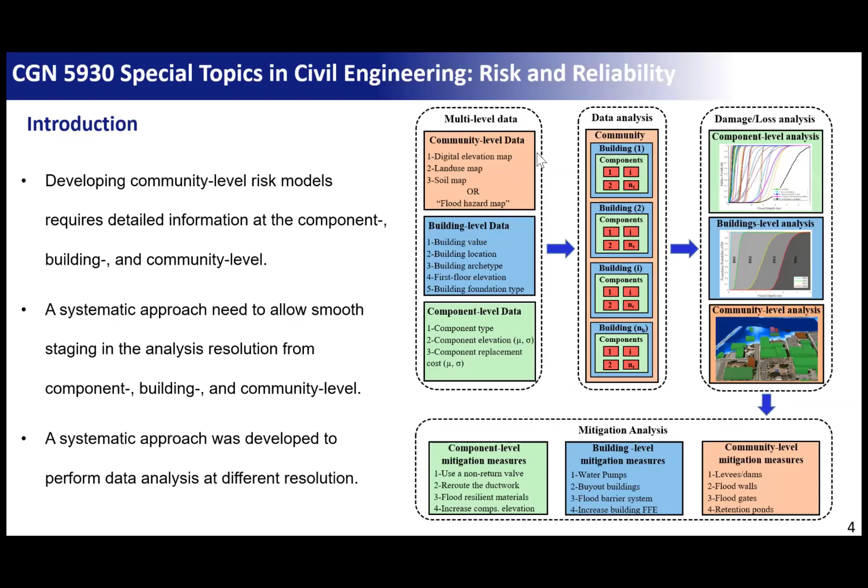All right, so the research in risk and resilience has three main areas that you can search in: risk analysis, resilience analysis, and recovery analysis. As I explained, risk needs a background about the hazard, the exposure, and the vulnerability. Hazards could be, for example, hurricanes, which I was talking about here. Hurricanes have lots of hazard components. They come with wind and with flooding, and the flooding has different types: coastal flooding, fluvial, and pluvial.

Because when hurricanes hit a coastal community, the coastal community is exposed to surge, seawater coming from the sea. But rainfall also comes on the inland community, and this rainfall gets into rivers, and the rivers make riverine flooding. So it also has fluvial. Fluvial is riverine flooding, pluvial is rainfall flooding. The rainfall itself is sometimes very heavy and causes lots of rainfall flooding.

And waves are one of the most destructive hazards that come with hurricanes. They cause structural damage. Surge usually causes content damage because it's just rising water. It doesn't push the buildings that badly, but the waves cause lots of structural damage. So waves are one of the severe hazards that come with hurricanes. So if you want to do research in multi-hazard hurricanes, you should have a background in all these types of hazards: wind, surge, wave, and so on.

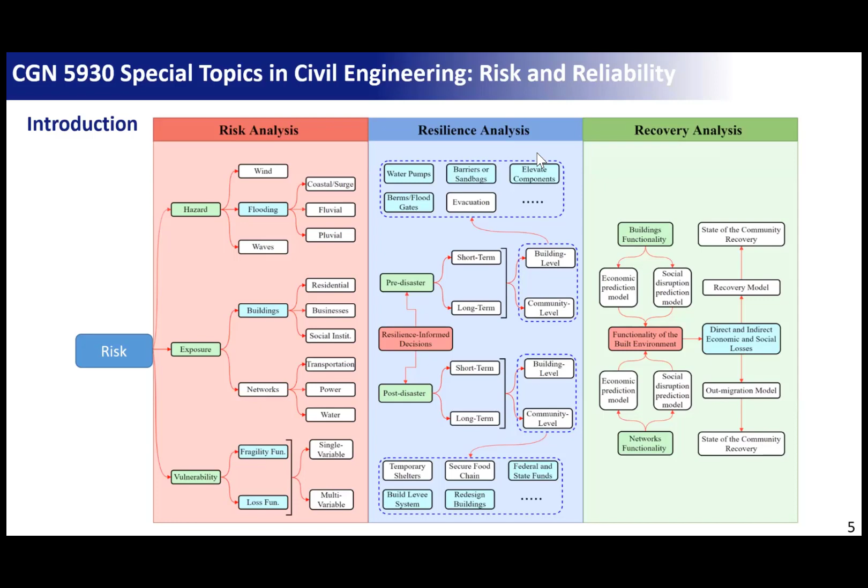Okay, so this is just kind of an overview of the different analyses that you can do in the general realm of community resilience. Well, let's see an example of a flood risk analysis, just to know how these concepts are translated into research. For flood risk analysis, I'm going to show an example of one of the communities that we have been working on for 5 or 6 years, modeling the community resilience of this community following natural hazards.

So this community is called Lumberton. So this is the city of Lumberton here. This is a small point, and this is how it looks. And every point here is actually...

Is it much better now? Yeah. So every point here is a building, and they are color coded based on the occupancy.

The green is residential, the red are commercial, and there's some yellow, which is schools and hospitals. And this city is in Robeson County in North Carolina. So here's the location with respect to North Carolina.

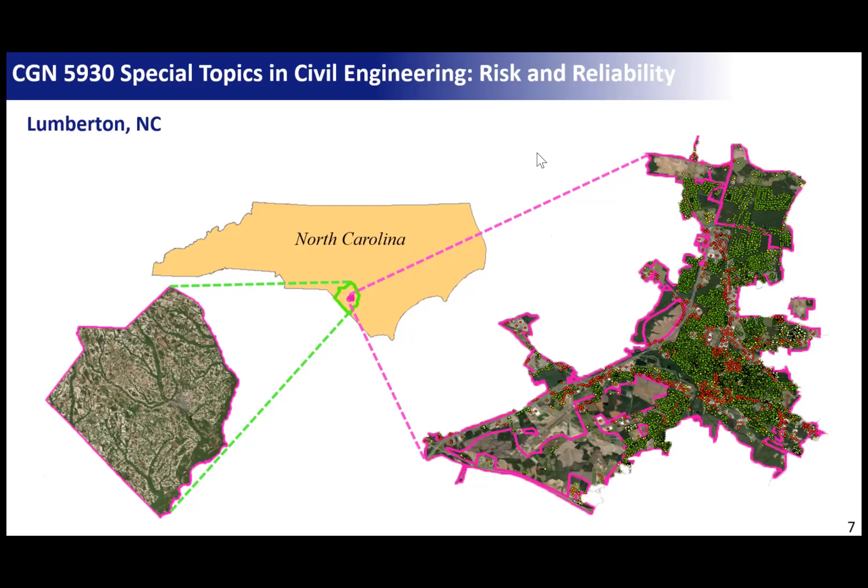So for the risk modeling for this community, to do flood risk analysis, we have to go through flood hazard modeling. We will have to go through 2 main processes. The first one is hydrologic modeling. So there's a rainfall, and this rainfall is falling on the ground. So we need to know how much is the flow in the main streams. We call this hydrologic analysis: to transform the rainfall into water flow. So we need to know how much water flows in each stream.

And to know this, we need to have a digital elevation map. We need to know what is the elevation of the ground. Okay. And we need to have a soil map and land use map, because both of these will tell me how much water is deeply infiltrated in the ground and how much water is on the surface. And we do some analysis on the DEM and on soil and land use to identify where the rivers are, what is the river's length, the river's slope, and all the basin characteristics.

The basin, I mean, we divide the city into basins, like catchments that catch the water. And where is the river in each basin? And what is the basin slope, centroid, and what is the longest flow path? Where is the water going that long? And based on this and using the rainfall information, we know what is the flow in each stream. And we get that flow in terms of what is called a flow hydrograph. The flow hydrograph tells you how the water flow is changing over time in the stream.

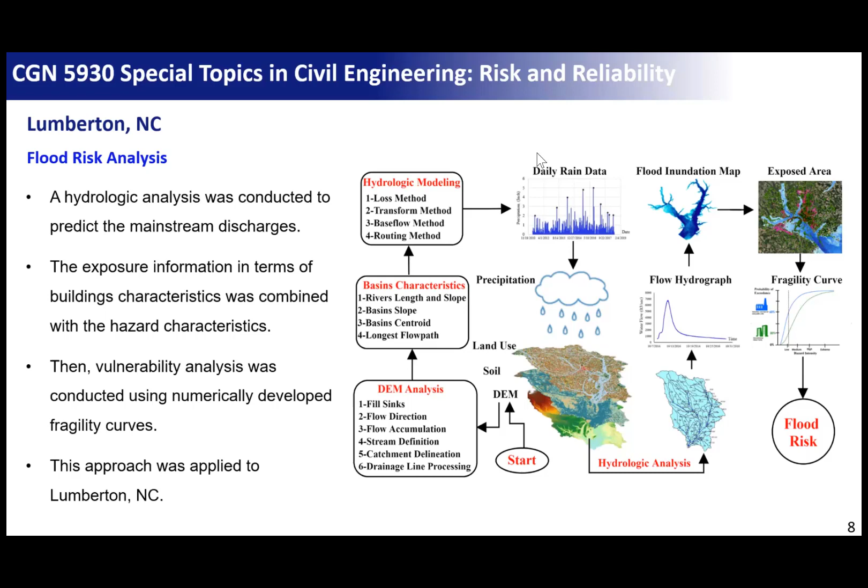We studied this community after Hurricane Matthew. Hurricane Matthew happened in 2016. It started as a Category 1 storm in the Caribbean, intensified to Cat 5, and made landfall as Cat 4 on eastern Cuba, then made its second landfall on the east side of North Carolina here. It was a Cat 1 storm, but the Cat 1 storm brought lots of rainfall in North Carolina.

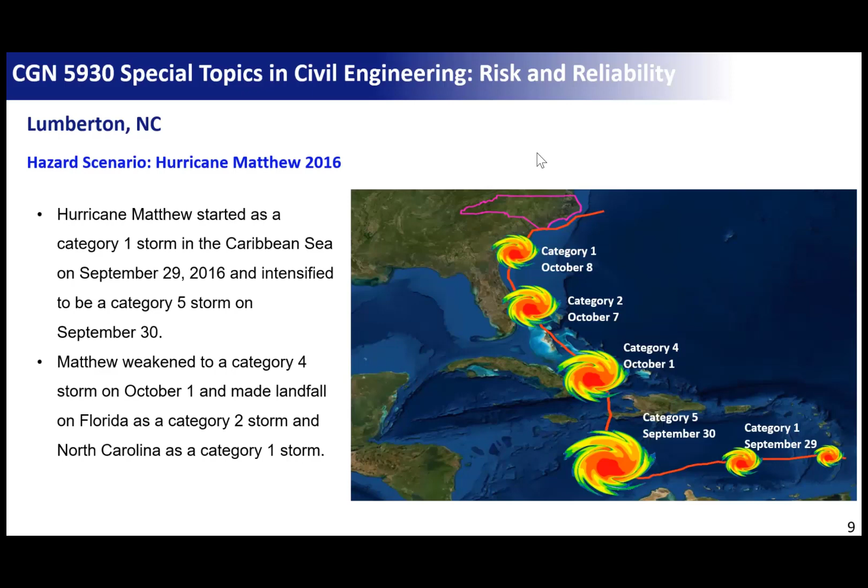Lumberton is here, which is away from where the storm made landfall, but the rainfall was very hazardous in this area. There was like 10 inches of rain. It was raining for 2 days and caused severe flooding in Lumberton, North Carolina. Here's how the rainfall intensity looked, in inches. Here's where the maximum rainfall happened, and Lumberton is actually in this location, and this is how the streets looked like within Lumberton.

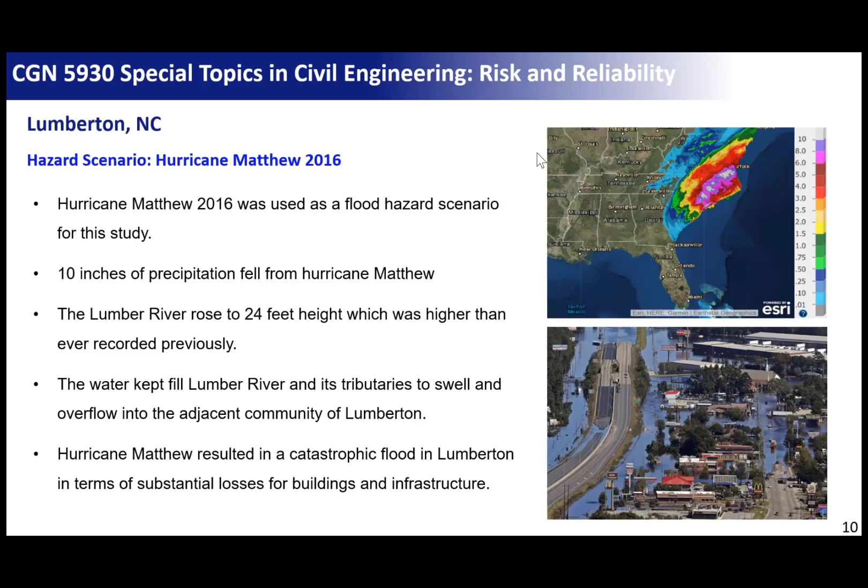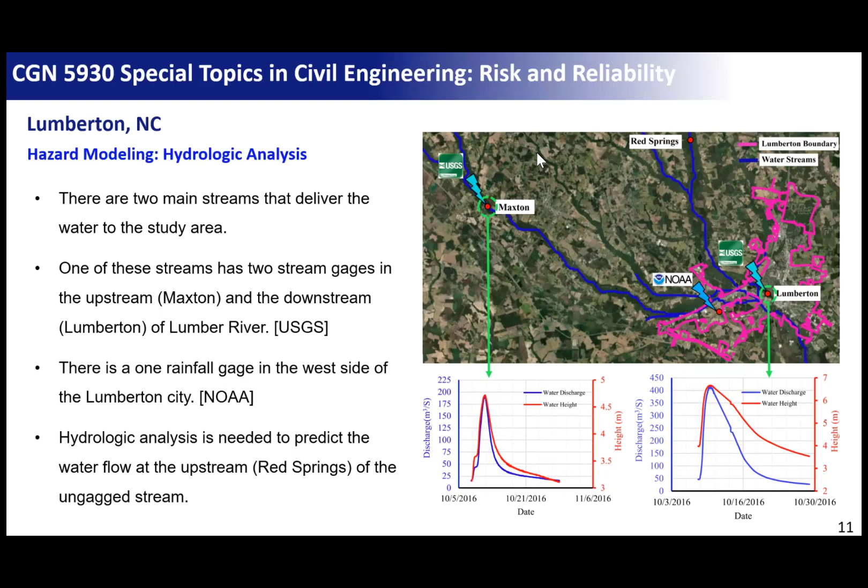The first thing we did for this city, we did hydrologic modeling to identify the flow hydrographs in the stream. We need to know how much flow is in this stream and how much flow is in the other stream. These two flows come together and enter the city here and make flooding. So this is an example. The flow comes from here as a boundary condition, and flow comes from here as a boundary condition. And here's how the water is getting into the city. This is how we model the hazard.

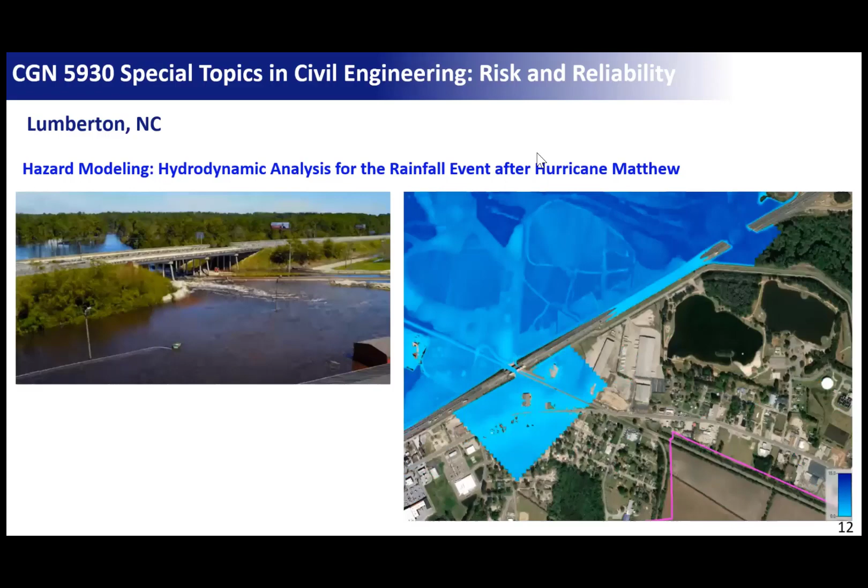Can you see this gap? There's an intersection between a bridge, between a highway and a railroad. Here's how the water is coming at this location. Most of the water is coming to the community from this location. That's what I was talking about. If we were able to plug the water here, we could have reduced the amount of flood damage.

This actually shows a scene of where the bridge is and how the water was coming, but not from Hurricane Matthew. It was from a hurricane that happened 2 years after, called Hurricane Florence, but it was much worse in Matthew. Florence was less intense. You see here how the flood happens, and this is how the hydrodynamic simulation looks. And these are the hazard maps that we need to use to identify the exposed assets.

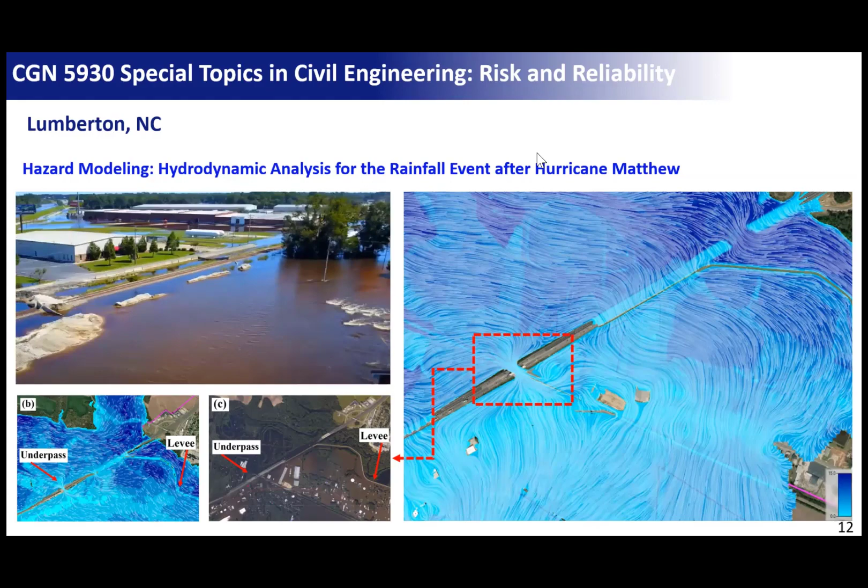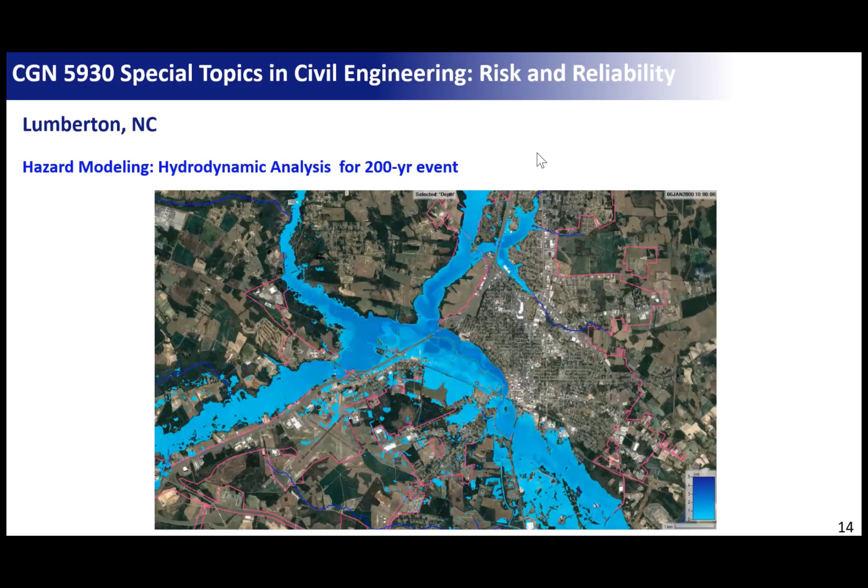But if we compare it with a 100-year event or a 200-year event, it will be completely different because it will be much more intense flooding. You will find much more flooding inland, and water overflows the rivers and floods the community. So we saw a real event like Hurricane Matthew and return period events like the 10-year or 200-year return period. And this is what we mean by hazard.

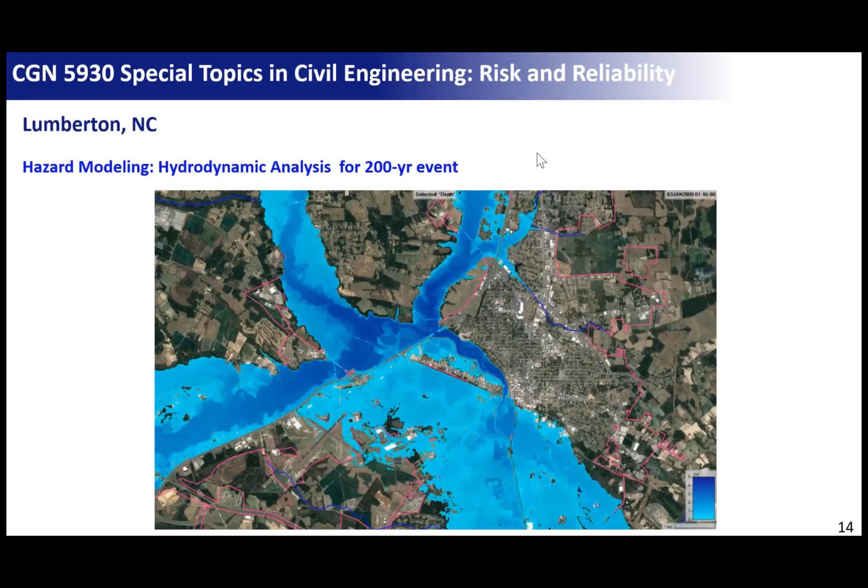The second thing is modeling communities. We need to model communities to identify the exposed assets within them. To model this community, we need data about the buildings, right? To know the exposed assets, we need to know where the residential buildings are. For buildings, we need to know the building materials, the number of stories, building use, the foundation type, the floor elevation, and ground elevation. You need to know all this information to know how vulnerable the building will be.

Because a building 1 meter from the ground is completely different from a building 3 meters from the ground. A concrete building is completely different from a wood building, right? So we need to know all this information. This data can be provided by the state; North Carolina actually has very detailed building data, open to the public. They can tell you how many nails are in the shingles of each building. But other communities don't have this data and we need to make assumptions. Getting the data is very hard. Sometimes we pay for data, sometimes we get it for free.

Sometimes we actually use Google Street View, walking the streets in Google Maps building by building, and identify: okay, this building is 2 stories, this building has a hip roof, has a gable roof, and we do this. But this process is very tedious when you have thousands of buildings. If I have like 300, I can do it.

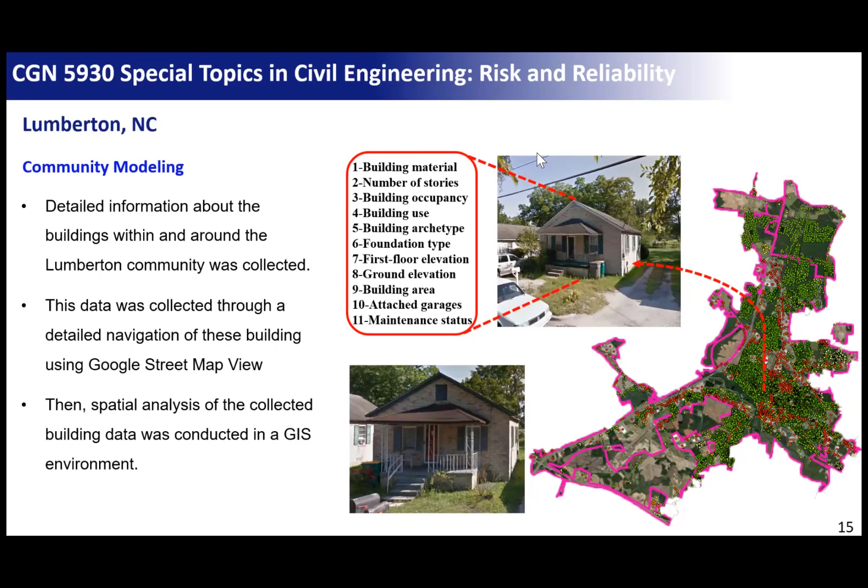So for flooding, we developed, for this community, 15 building archetypes. These archetypes have 4 residential buildings, 5 commercial buildings like gas stations, strip malls, shopping centers like Target and Walmart, 2 schools, 1-story and 2-story school, hospital, community center like church, office buildings, warehouse, lots of different building archetypes.

And we know detailed vulnerability information of these archetypes. We have the fragility function or the vulnerability function or the damage function for each one of these buildings. But the challenge is, how can we know that a specific building in my real community matches these archetypes? How can we say that this specific building here is archetype F1, or this building is archetype F4, or this building is archetype F5? Okay, so this is a challenge. How can we know this?

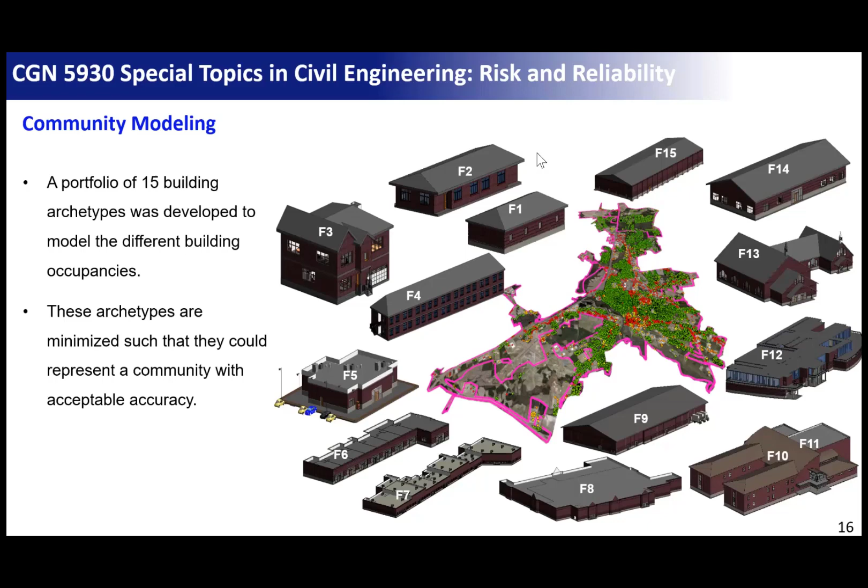So we developed an algorithm. So this is actually the archetype 15, and these are some of them, like the names, like one-story residential building on a slab-on-grade foundation, or F11 two-story school. Okay, so the next challenge is, how can we know that this building is a specific archetype?

So to know that a specific building is a specific archetype, I need to know all the information about this building. What is the construction material? What is the roof shape? What is the number of stories? What is the foundation type? All this information. And we developed an algorithm. It's like a for loop.

So this for loop goes building by building, and it checks, does this building have this type of foundation? Does this building have this number of stories? Does this building have this construction material? And if it satisfies all the conditions, this building is archetype F1, and then you check other conditions. So if it has a crawl space foundation, it's F1. If it has a slab-on-grade foundation, it's F2.

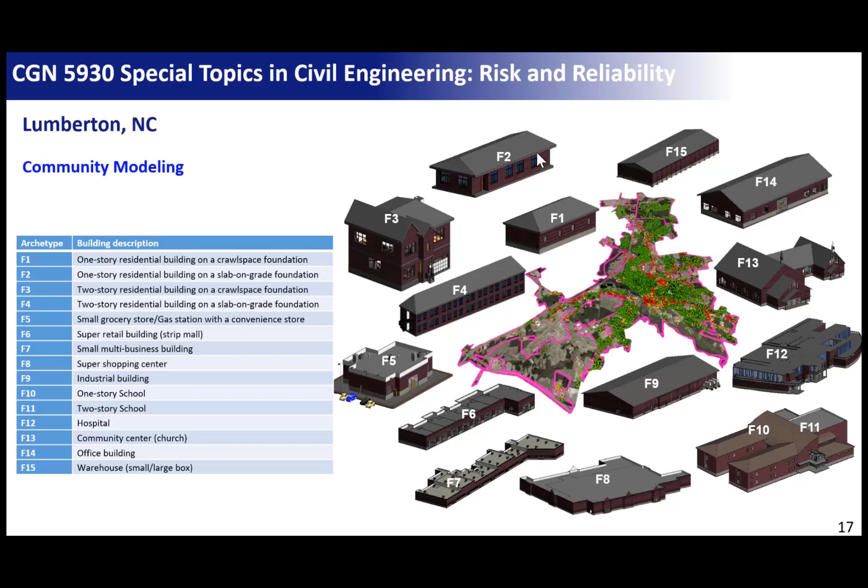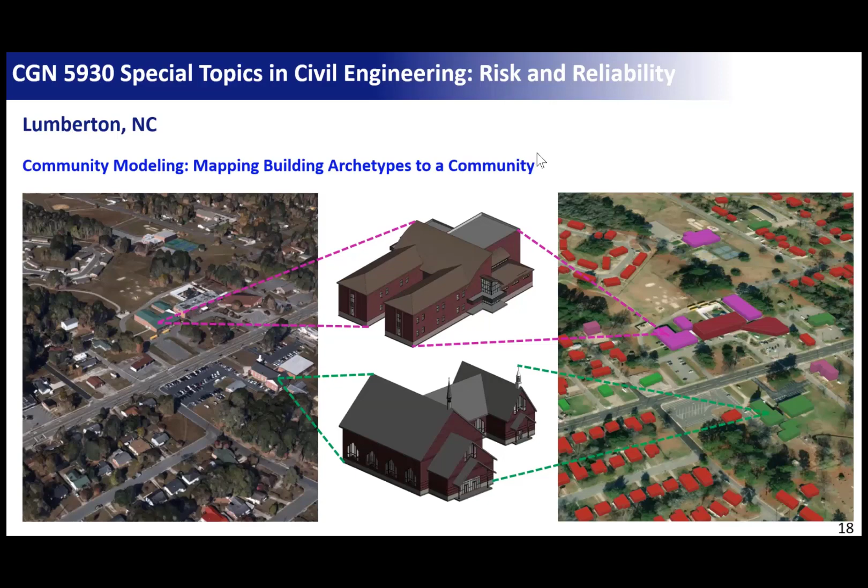So it's an algorithm that has a for loop embedded, and it checks building by building some conditions and assigns an archetype. And we call this the mapping algorithm. It actually maps real buildings. So I know that this is a church, so okay, I assign an archetype of a church. I know that this is a school, so I assign an archetype of a school, based on the mapping algorithm.

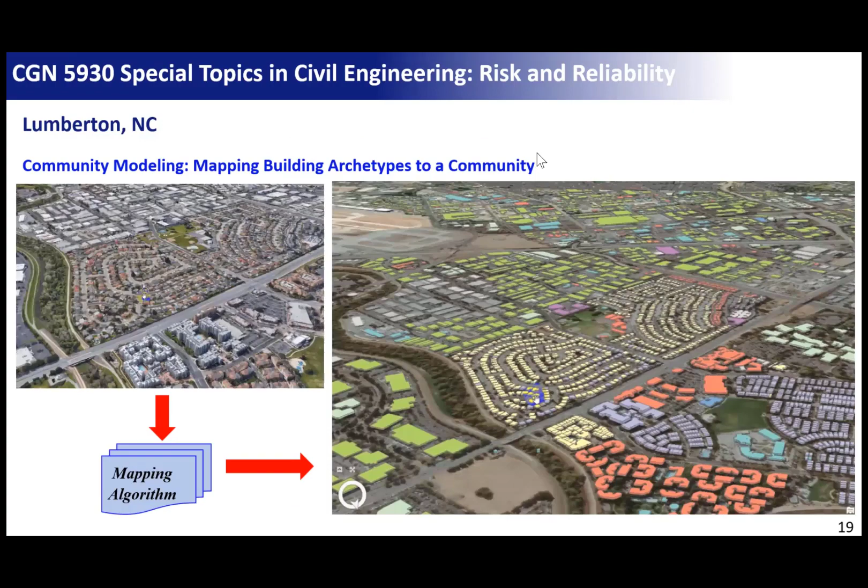We did this for many communities. This is one of the example communities that we applied this mapping algorithm to. So this is actually the real buildings, and these are the mapped archetypes, color-coded based on their archetype, like archetype 1, archetype 2, archetype 3. So right now, we were able to develop a model for the entire community, right?

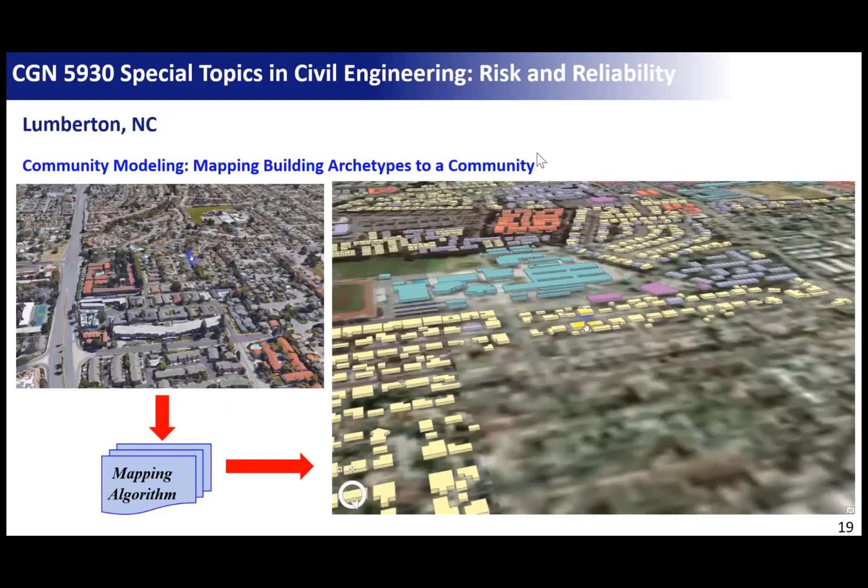The next step is to identify the exposure of these buildings. Which of these buildings are exposed and which are not exposed, and how much is the exposure? So the next step is to overlay the hazard map with the buildings. And once you overlay them by spatial analysis, you can identify what is the hazard intensity at each one of these buildings.

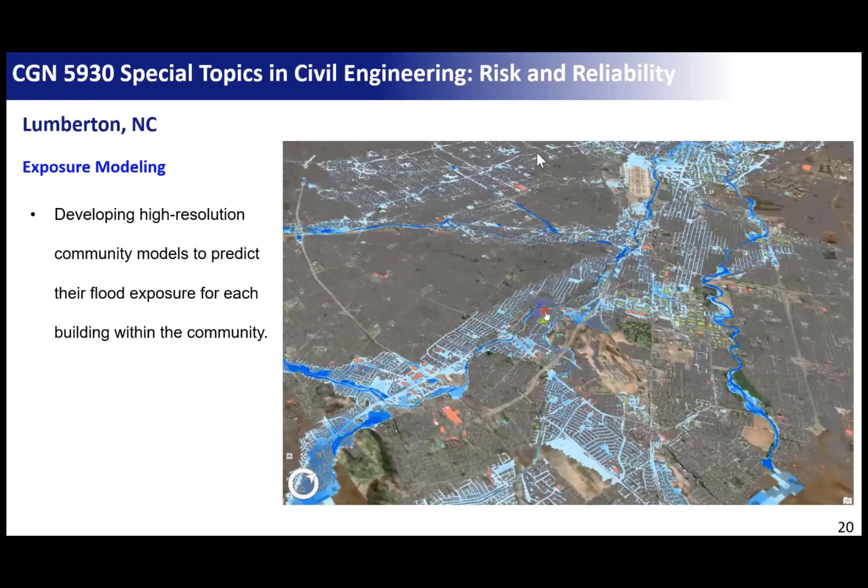Some of these buildings will have lots of flooding, some of them are not flooded. So that's what we call exposure analysis. You will know what is the flood depth at each one of these buildings. Once you know the flood depths at each one of these buildings, you can start the next step, the vulnerability.

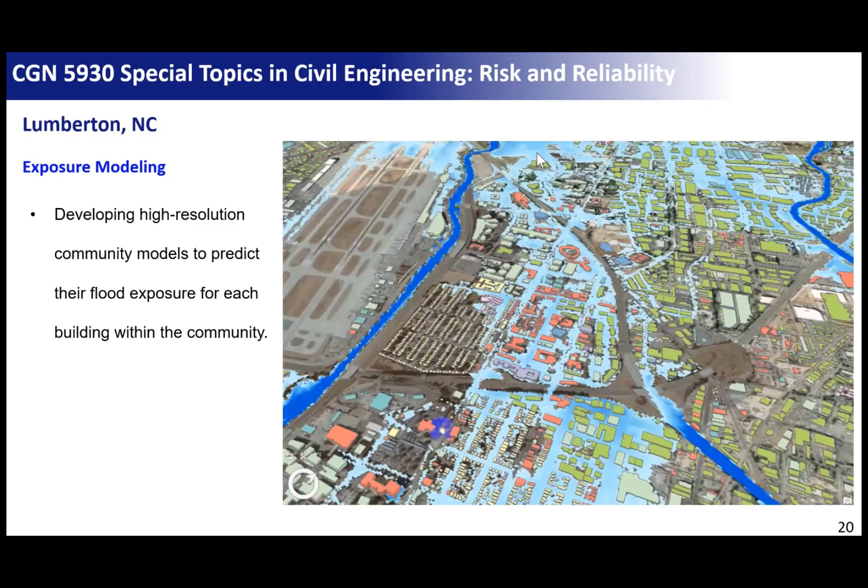Because to identify damage, you need to know the hazard intensity, like wind speed or the flood depths, so that you can know how vulnerable these buildings are. So to develop building-level vulnerability functions, we have to start with components. We have to know the vulnerability of each component within the building. And by vulnerability here, I mean flood vulnerability.

What is the vulnerability of your external AC unit? What is the vulnerability of this table or these chairs? The fridge, all the appliances, all your furniture, the couches, the beds, everything in your building. Okay, so what we did, we divided the building into components, and we identified the flood susceptibility of each one of these components. For example, this is a one-story residential building on a slab-on-grade foundation. It has over 65 components.

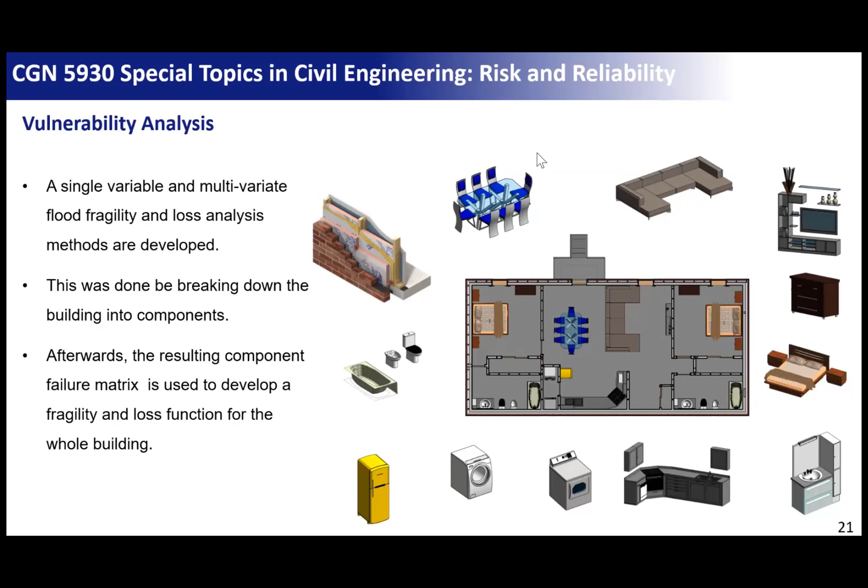We have a fragility function for each one of these components, and we use the concept of reliability and Monte Carlo simulation to develop a fragility function for each one of these components. So we have gone through a process. Let's assume that this is a wall, and this is the resistance of the wall. It's a normal distribution, okay? So let's assume the mean resistance of the wall is 1 meter flood depth.

So if you were hit with a flood depth of 0.5 meter, you will have, for example, 50% probability of failure, or 20%. But if you have a 1 meter flood depth, you might have 80% failure. But if you're hit with 3 meter flood depths, it might have 100% probability of failure. And that's what we are going to learn, how we can calculate the probability of failure of the components, knowing the distribution of the resistance, the probabilistic resistance of these components.

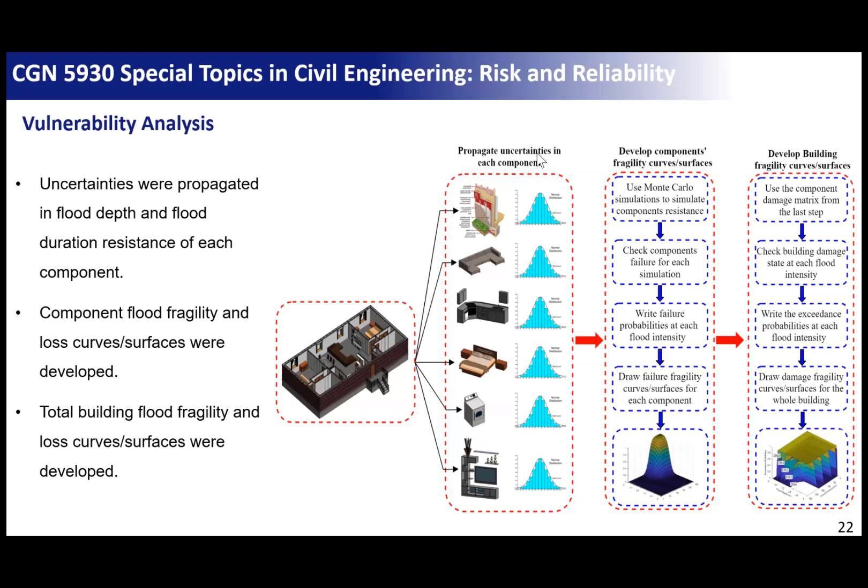Yeah, so this is an example that shows you the uncertainties. Sometimes we are not talking about real damage to the component, like the columns. We are talking about an AC unit or an electrical socket, something like this. If it's hit with water, it's gone. So how can we know this? Uncertainties can be in the elevation of the AC unit. Sometimes we see this AC unit is on the ground, right?

Some people put it 10 centimeters or 20 centimeters from the ground. Some people put it 80 centimeters from the ground. So there's uncertainty in the elevation of this AC unit, right? So if we were able to propagate the uncertainties and know the distribution, the mean level of the AC unit and the standard deviation, we can know the probability of failure of this AC unit. Okay, so that's what we do for every component in the building, like AC unit, appliances, furniture, and we were able to identify the probability of failure of each component.

But once you identify the probability of failure, the next step is: what is the impact of failure of this component on the total performance of the building? Okay, if you don't have an AC, you can live without AC for 2 days, so it's not that big a deal. But if all the appliances are damaged, stove, fridge, and your furniture, like couches, bed, you cannot live.

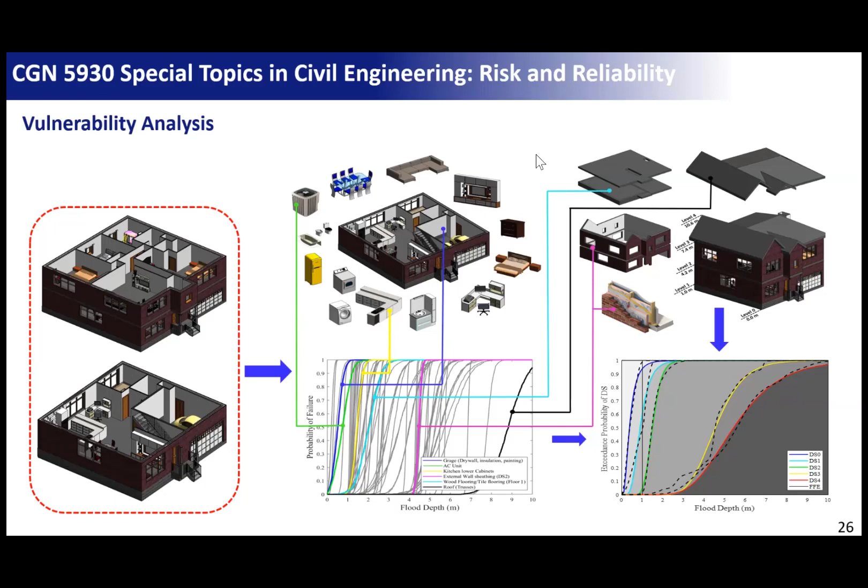And also this shows how we were able to convert component fragility into building fragility. So as I told you, there are some components that tell us what is the damage to your building. And when you have structural damage, we are talking about foundation, walls, roof, all this is structural damage. And when your structure is damaged, it doesn't matter how many components you have damaged, your building is entirely damaged because the structure needs to be demolished and get a new structure.

So I'm showing here an example of 5 components that tell us what is the probability of being in complete damage state. So you need to convert these 4 or 5 curves into one curve. So we do a weighted average of this. You can do it based on the importance of the component, but what do you think is the most critical when you weight component damage? I believe the price. Because damage to a fridge that is worth $1,000 is completely different from damage to the roof that is worth $100,000, right?

So based on the price of the component, we weighted them, but actually you can weight them based on how much time they take to recover. Maybe you have a drywall damage that is worth $10,000, and also appliances or a computer that is worth $10,000, but the computer you can buy and get the same day. But a drywall, it's a construction job. It needs a permit, it needs time, it needs a contractor. It might take 2 or 3 months. So you can weight on different things.

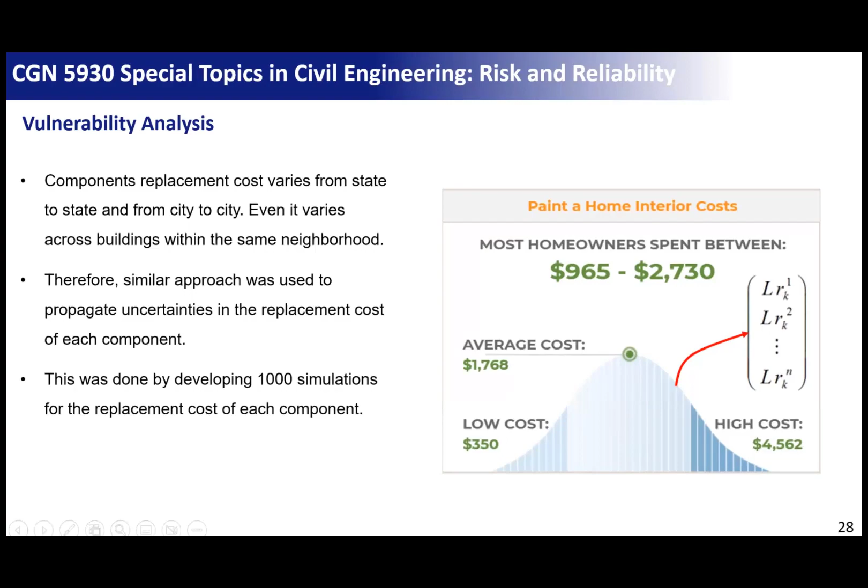How will you determine the damage ratio to identify what level you're in? Okay, let me go here. Once you know the components that are going to be damaged, for example, you have 6 components in damage state 1, we price these components. We have the mean unit price of each component and the units we have. Like for drywall, how many square feet of drywall you have and how much one square foot costs. And this is a mean and a standard deviation.

So finally, we have the mean and standard deviation of the replacement cost of each component, and of the entire damage state, for damage states 1, 2, 3, up to 5. This is how we get these values. And it's a range because it differs from one building to another. A hospital is completely different from a school, and completely different from a regular residential building.

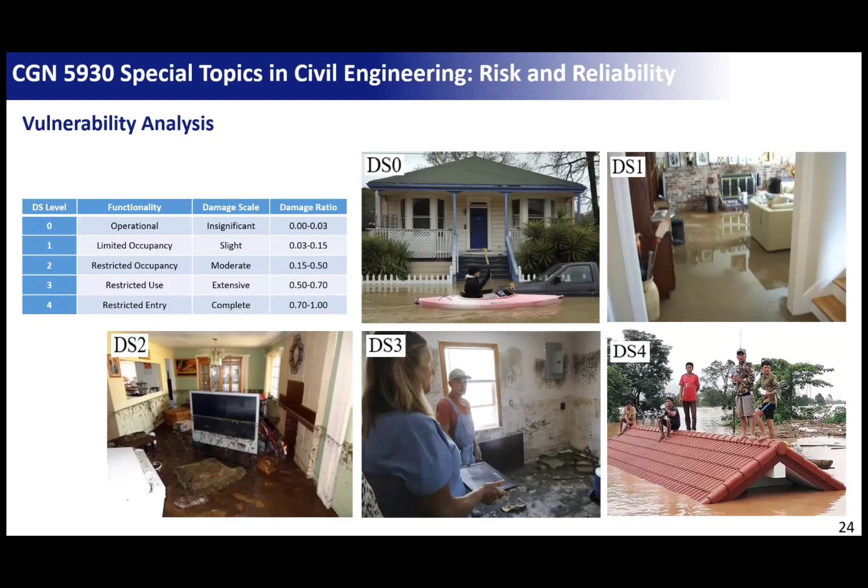So determine which damage state I'm in and divide the cost of the components that are supposed to be damaged by the total cost of the building? You mean this one? No, to determine the actual damage ratio. Yeah, so what we did here is we have the failure probability of each component, and we weight each component by its replacement cost over the total replacement cost of the entire damage state. Like if damage state 4 is worth $100,000,

one component is 10,000, one is 30,000, and another is 60,000. So the 60,000 component will shift this curve more than the 10,000 component. So the summation gives me the damage ratio? Yeah, the summation gives you the damage ratio for the entire damage state.